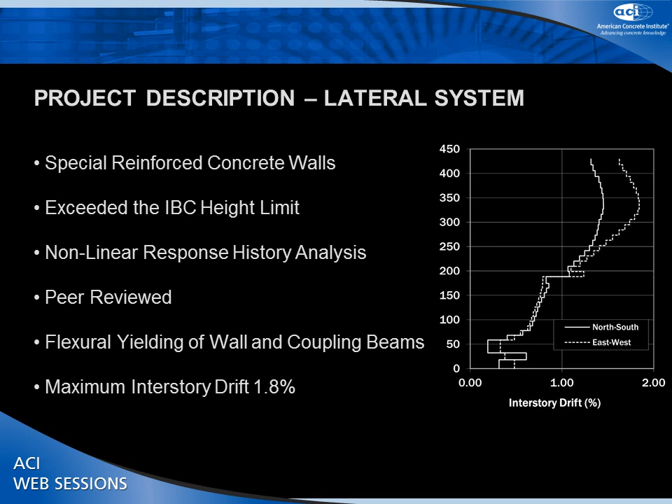Just a couple notes on the behavior of the building: the non-linear behavior is yielding at the hinge of the building, and we also had some coupling beams that we would expect to yield. The performance was the maximum interstory drift was 1.8%.

The gravity system of the building - I'm really focusing on the repetitive tower floors. There were some different gravity systems as we got down to the base of the building, but the typical floor in the building is an 8-inch mildly reinforced slab spanning 23 feet. And that, I would say, is unusual in Seattle.

Typically, a project like this would be done with a post-tension flat plate. But in this particular case, the owner had some aversion to post-tensioning, which is why we wound up with a mildly reinforced system. Since we're on this topic of deformation compatibility, one of the other parts of the design is to demonstrate that the floor system can also handle the building movements. I forget which code cycle the provisions came into Chapter 21 to deal with this, but essentially what we did on this job was comply with the straight provisions of the building code.

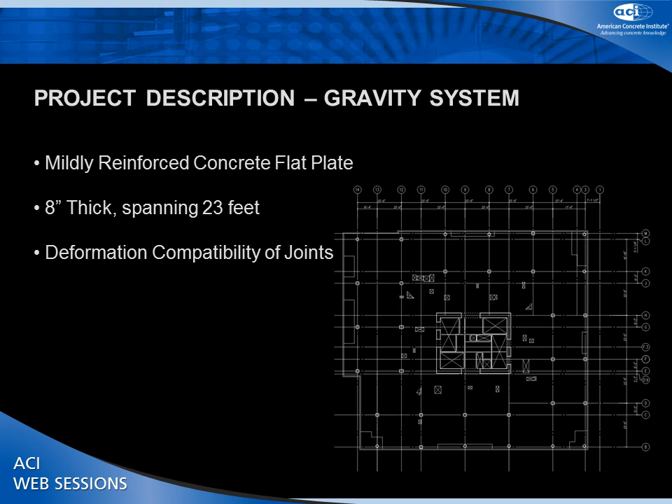One of the perspectives I'm trying to offer this morning is this idea of a designer's perspective on this problem. This may sound a little bit, when I talk about this, like baseball, apple pie kind of stuff. But I hope that as I continue to talk through my approach to this, you'll see that this really does have real implications for decisions I make during design.

Obviously my number one priority is life safety. And then from there, I start thinking about what's the owner's interest here. Usually the most common things are cost and schedule - that's what owners worry about. Some cases there may also be performance concerns, but on this topic of deformation compatibility, really all the owner cares about is least cost and building it as quickly as possible.

And then once I've taken care of the public's interest and the interest of the owner, then frankly I'm worried about my interest. One of my interests here is to do the least amount of effort that I can while still doing something that's safe and still meeting what the owner needs.

So how I think about that least effort approach is that I really need to focus on the engineering that I need to do to produce the drawings. It might be nice to do something else just to totally understand how the building is going to behave. But really I need to work backwards from the drawings to what is the engineering I need to do to justify what's on the drawings.

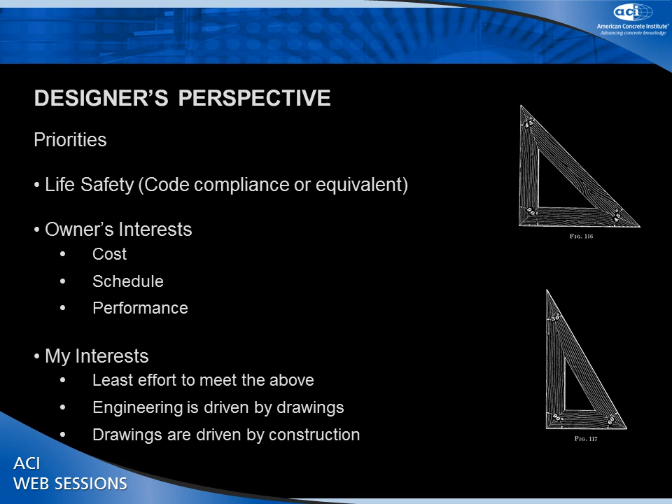And then the drawings themselves need to be driven by the ultimate end use of the contractor constructing the building. So I need to think about the drawings from what does the contractor need to know. Then as the engineer, I think about what do I need to understand to be able to put the stuff on the drawings, and not really to do much beyond that. So I've laid out that framework.

Let's take a look at what the code says. What the code basically says for this deformation compatibility is the first decision you have to make is whether you're going to calculate the forces due to the building displacements - in this case, actually model the columns with the building and then see what forces that introduces into the columns.

Obviously, especially in this case where we're doing this whole nonlinear response history analysis, it's certainly a doable job, but there's going to be some real effort there. So just thinking about this from my interest point of view - I'm not too thrilled about that idea.

But if I don't calculate the forces, then I immediately need to detail the column as if I'm expecting the column to hinge in a seismic event. And so there's going to be some consequences for the owner - it's probably going to be a more costly, slower to build system than it would be otherwise.

But if I choose to go the route of checking the capacity of the column for those imposed forces, and the column actually proves that it can withstand those forces, then I get a break on the detailing because we know that the column is not going to have to hinge in the seismic event, and so I can back off on the reinforcing. There is a chance that I could look at the column and it's not okay, and then I get kicked back into needing to detail it as if it's going to hinge.

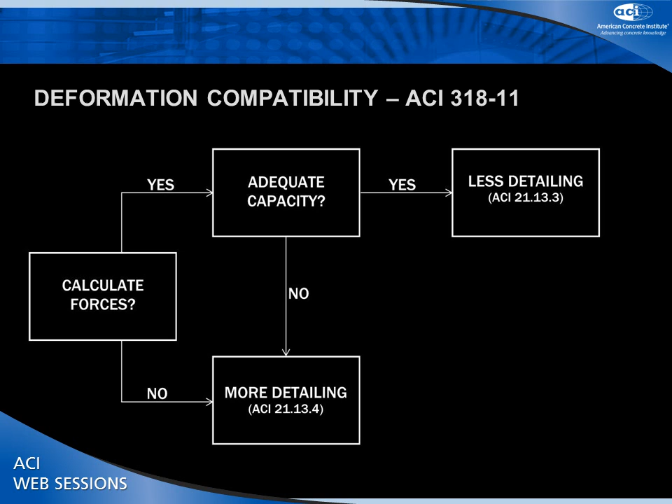So it's kind of clear to me in thinking about this that it's in the owner's interest that I calculate the forces so that I can do the minimum amount of detailing for the column. But let's think a little bit more about what's involved on my end in doing that. The commentary to this section gives us some guidance as to how we need to go about checking deformation compatibility.

And there's a bunch of stuff here.

Models used to determine design displacement of buildings should be chosen to produce results that conservatively bound expected values of the design earthquake, and should include, as appropriate, effects of concrete cracking, foundation flexibility, and the deformation of floor and roof diaphragms. All good stuff.

I certainly can go through and make some judgments and figure out how I want to capture this behavior. But I'm thinking about this in context of having a peer reviewer involved. I'll have one opinion about what the effects of concrete cracking are, and the peer reviewer may well have a different set of thoughts about it, and I'm doing all these nonlinear response history analyses. So as I look at this more closely, it's continuing to make me a little nervous about what the effort here is going to be.

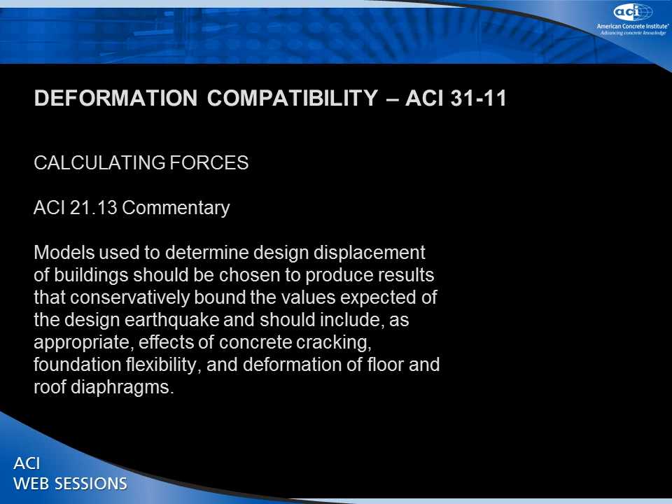That leads me to ask: what really is the consequence for the project if I was to not calculate those forces? So for this, I'm just happy to pick a column near the base of the tower. It happens to be an 18 by 24 column, 8,000 PSI concrete, and a longitudinal steel percentage of 2.5%.

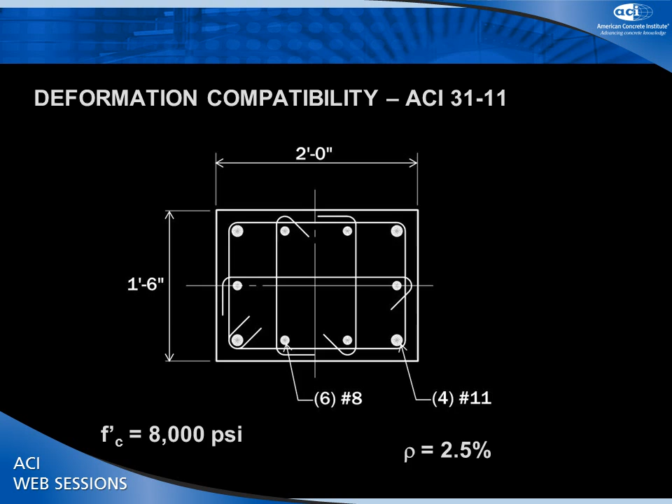So if I look at what's the difference in the detailing provisions of the code, depending on whether I don't calculate the forces and detail at the hinge, or whether I'm able to show that it's okay and get away with the lesser detailing - immediately you can see I have a bunch more notes on the right-hand side, which is the case where we need to detail the column to allow it to hinge.

Specifically, the biggest issue there is that the lap splice for the vertical bars has to be in the center half of the column, and contractors hate doing that. They hate having to do their splices up in the air. So if we were to ask a contractor what they thought about these two details, that's probably would be their biggest objection - having to put those lap splices at mid-height.

You can also see that the ties are more intense - they get as tight as number 5's at 4 inches on center in the hinge regions. Whereas if I can do the minimal detailing, I can get away with doing number 4 ties at 5 inches for the full height. So there's clearly some savings to be involved by doing the lesser detailing, and a pretty good incentive to figure out a way to do this.

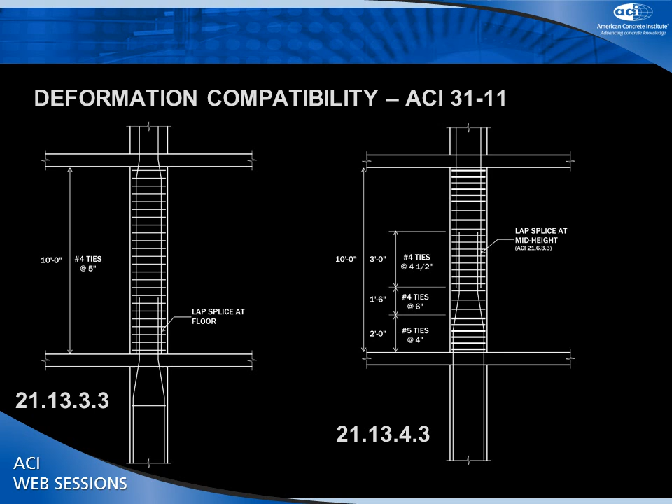And so, let's go here. Okay.

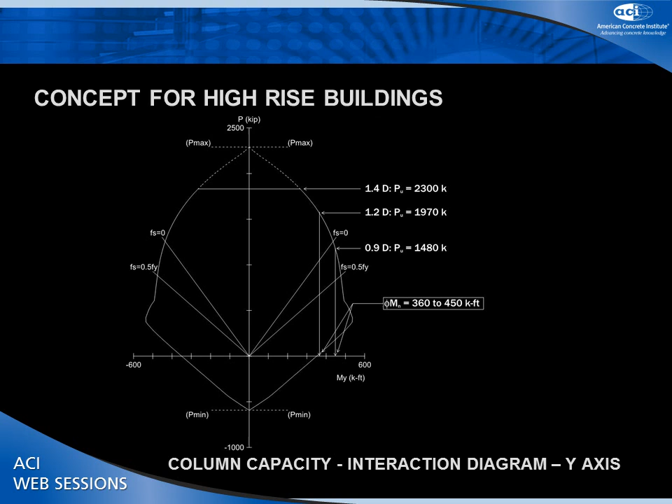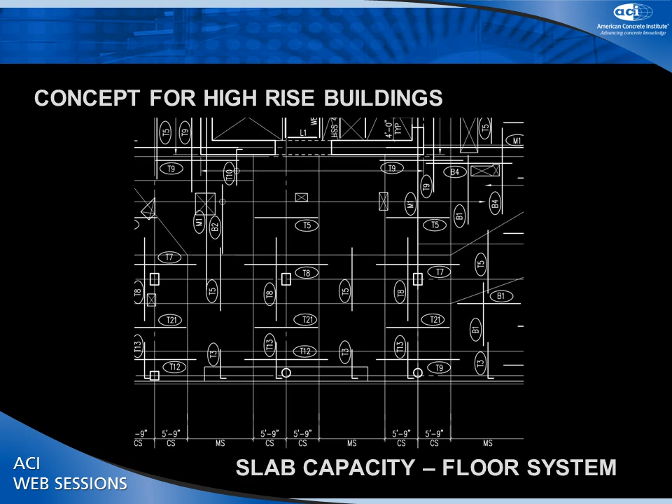So my conclusion is that this suggests maybe I don't need to be - I should say careful, that's not a very good word - very precise about how I determine the demand of the column, because I've got so much capacity here to play with. And then if I think about the floor system, I've got this 8-inch mildly reinforced flat plate. It's probably not going to have a whole lot of strength, particularly once you compare it to the columns.

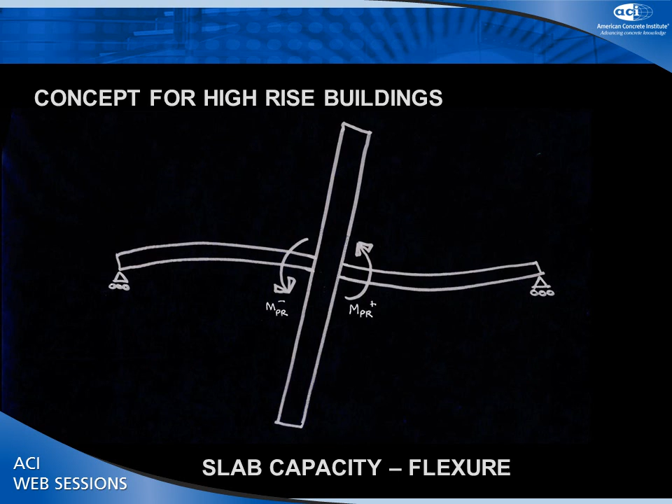So what that suggested to me is why not simply demonstrate that the columns are strong enough that we can yield the floor framing and we're fine. We've already demonstrated - we did the deformation compatibility check of the floor - so we've shown that the floor can handle the deformations that would be involved in this mechanism. So why not just show that the column's stronger than the floor, we're okay, good to go.

And so then the question I'm faced with is, well, how do I want to compute the capacity of my floor system? So my first thought was, why not look at what's happening in the punching region? That's what we're checking when we check deformation compatibility. That's often the weak link in the floor.

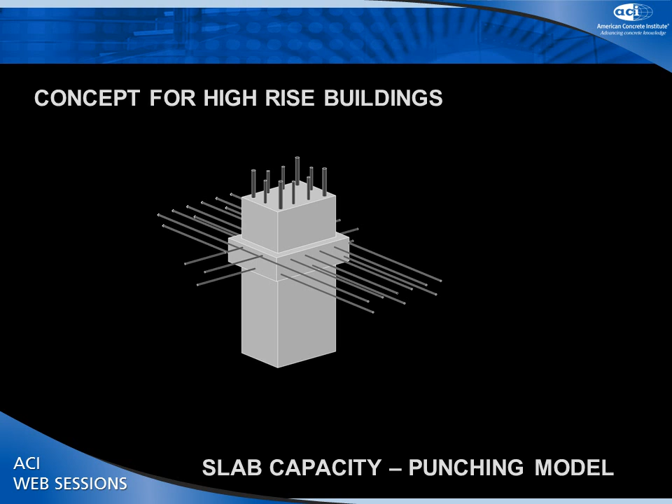But what I didn't like about this is its behavior there is pretty complex. You've got unbalanced moments, you've got shears, some torsion going on, and so I could probably come up with a pretty good estimate of what I think the moment it could withstand. But again, if I need a simple story to tell a peer reviewer, this doesn't sound like it's going to be a simple story to me.

And so that led me then to another mechanism, which is just simply to take the full width of the slab from mid-bay to mid-bay and just look at all the slab reinforcing in that zone. How much moment can I crank into that strip? Because there's no way that any more force can be delivered to that column than what it would take to just fully yield the slab.

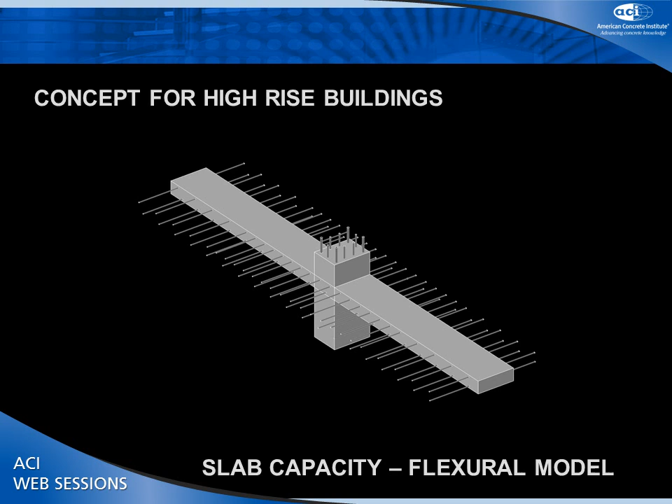And so, let's just go back there. That's really just the gist of my whole presentation: to estimate the capacity of the floor system and then show that your column is more than okay for that capacity. And so I wanted to walk through a little example and show how that actually played out for that particular column.

And it was a 5-step procedure that I used to check this. So obviously the first step is to figure out what the demand from yielding the floor system is. And then from that, like we looked at those interaction diagrams a little bit ago, I can look at, for that moment, how much axial load I could put into the column.

And then I just compare that. Once I've established that acceptable range of axial load, I can compare that to the loads I've actually computed on the columns. And if I show that's okay, then I get to jump to doing that lesser amount of detailing. And then the last question I'm faced with is I just need to also demonstrate that shear in the column is going to be fine.

And so the first thing to do that is just to figure out what the minimum amount of confinement I need is, and then it'll be pretty easy to show that our shear capacity is fine.

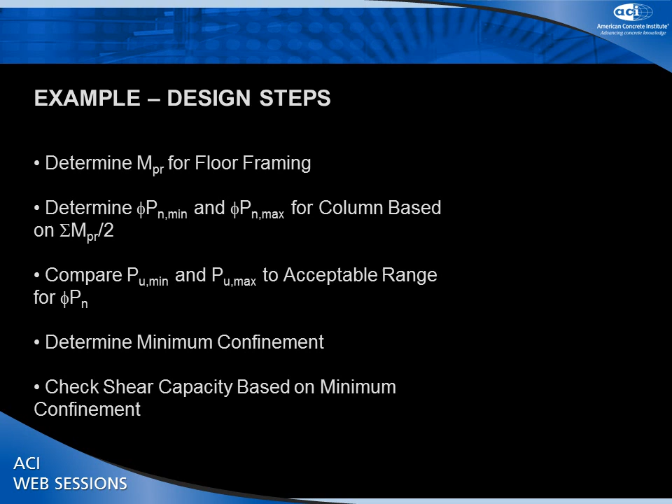And so in order to figure out the capacity of the slab, we need to basically just look at, for a given column, how much reinforcing is there that we'd have to yield to create that mechanism in the slab. For the particular column we're going to look at, it's the middle column on the screen there. I've got bottom reinforcing in the slab, number 4 at 13. And then obviously I have heavy reinforcing over the column and some lighter reinforcing out in the middle strip.

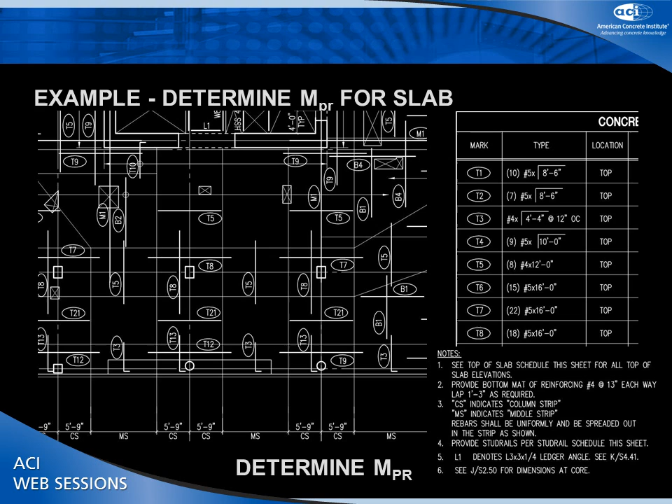And so I'm going to have the positive moment developing on one side of the column, the negative moment on the other. So first I compute the positive moment capacity here. You could say I've got the 4s at 13, winds up being a little more than 4 inches of steel in it, which gives me 184 kip feet of capacity, of potential capacity. And since we're doing MPR here, you can see that there's no phi factor, and I'm hitting the yield stress with the 1.25. So this is really how much force the slab could develop.

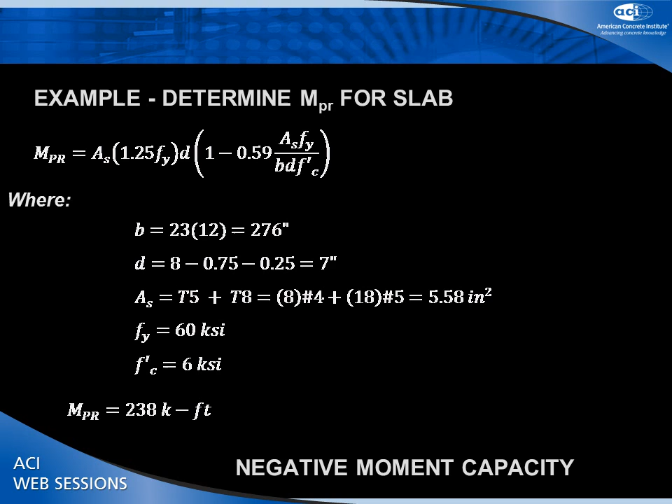And then I just do the same exercise for the negative steel. Obviously I've got more negative steel than positive steel, so it gives me another 238 kip feet of moment. And then the total demand on the column is basically just taking the sum of those moments on the two sides, and then I divide that in half, because half the moment goes up, half the moment goes down. And so then the moment that I need to check my columns for winds up being just a shade over 200 kip feet of moment.

And if you remember back to what those interaction diagrams we were looking at, I think you know how this is all going to turn out.

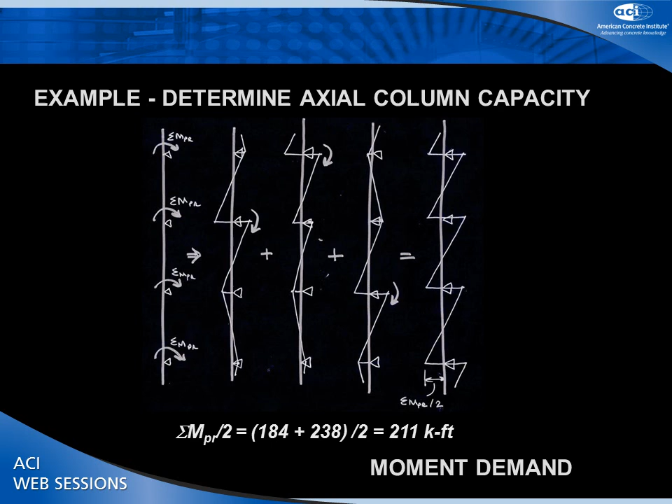And so this is the strong direction of the column, and now I'm simply looking for my 211 kip-feet moment, how much axial load can the column withstand. I got a huge range here. I could put as much as 1,830 kips of compression load in the column, or the column could go into 350 kips of tension, and it would still be okay.

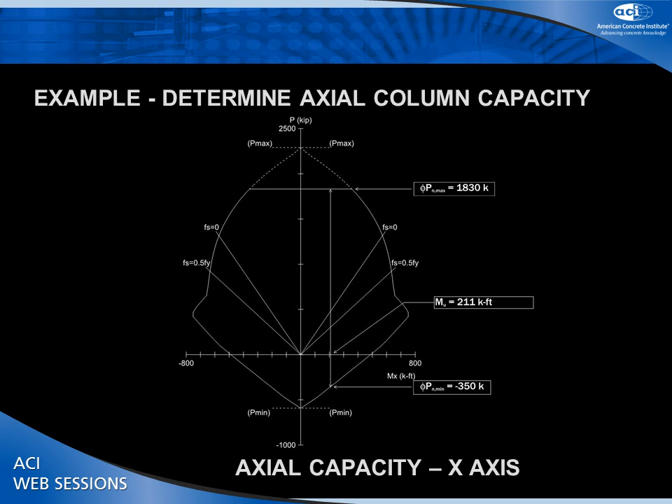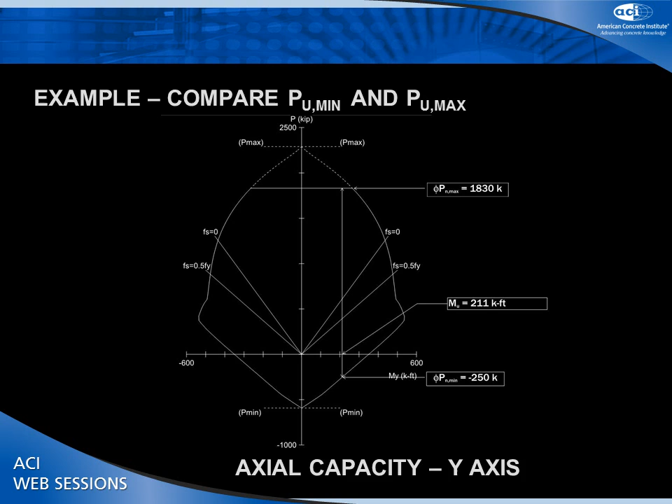And then if we look in the weak direction, it's about the same. I could again max out 1,830 kips, or take up to 250 kips of tension. So for the amount of demand that the floor system can possibly put into the column, the column's not working hard at all. And so then I just compare that range. You can see we're nowhere near.

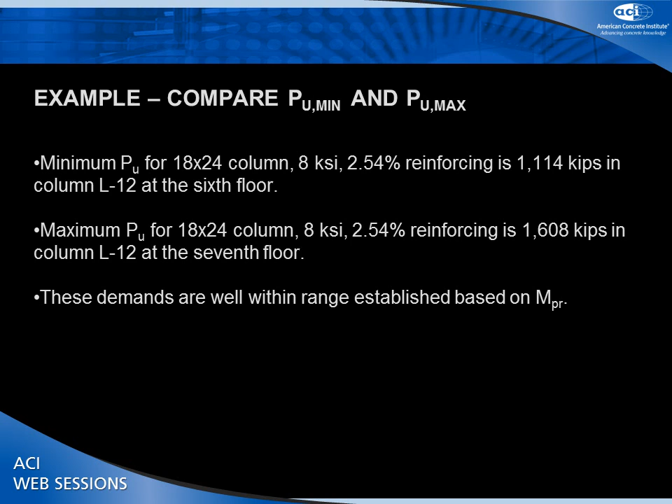So the lightest load I had in a column, that particular column with 2.5% of reinforcing in it, was 1,100 kips. The biggest load was 1,600 kips. I'm way up top of the interaction diagram, taking the 211 kip-feet moment that the floor system can generate, no problem at all.

And so then I'm just left with figuring out what the minimum confinement in the column is, and then I'm going to check it for shear. And because the column is so heavily axially loaded, I do fall into some more stringent things as far as tie spacing and area of steel.

And so the tie spacing just needs to be 6 times the diameter of the smallest longitudinal bar. In this particular column, I had number 8 bars, so that would say 6-inch spacing. It's also limited to 6 inches, so those two are the same. And then this last equation is basically a function of what the lateral spacing of the confining steel is in the column.

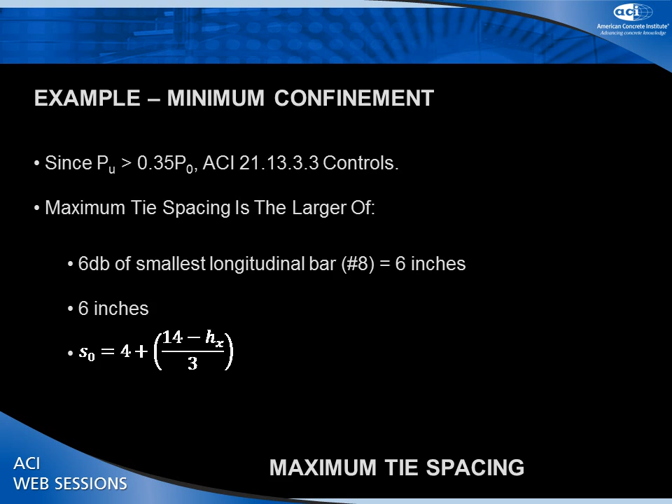And we can see that on this side, in the wide direction I've got 4 ties crossing it, and in the narrow direction I've got 3 ties, giving me the biggest space between confining reinforcement of 9 inches. And so that dumps out and tells me that would actually be my controlling case. I would need to get the ties down to 5.5 inches, something like that.

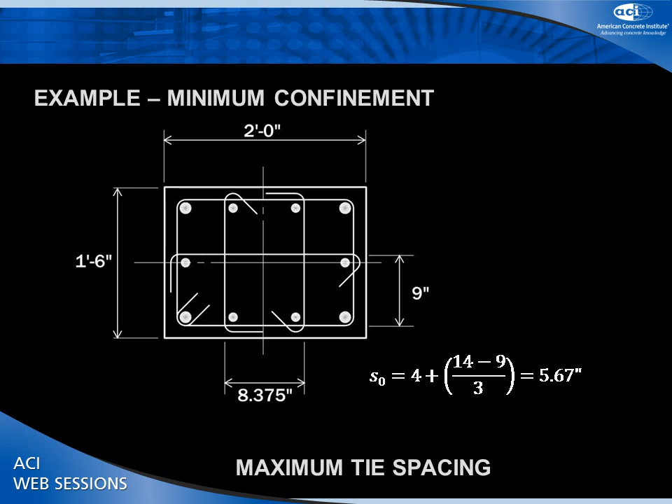And then the other requirement is I need to provide a certain minimum amount of area of steel. So I've established how the ties need to be spaced across the column, and how they need to be spaced vertically in the column. And then I just need to figure out what the area of steel is. Since this column is not expected to behave nonlinear in the nonlinear range, I get to use half the confinement that I would need if it was otherwise.

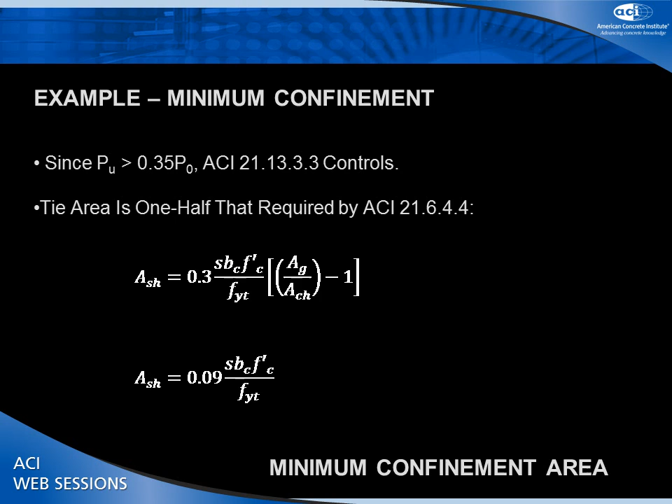And so when I run through the numbers on that, we find out that in the strong direction of the column, or across the wide face of the column, I would need number 4s at 5. And then we do the same exercise across the narrow face. It's also number 4s at 5.

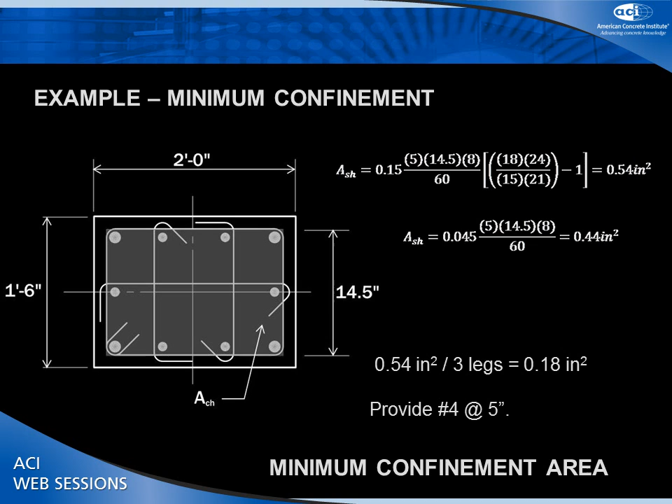And then the last thing I need to do is just look at the shear strength. It winds up being a trivial amount of shear once you think about how much steel I have in it. I didn't even bother to run the calc on it, because it's obvious—if I've got 20 kips of shear in a column that's got this much confinement, this much axial load on it, we're going to be good.

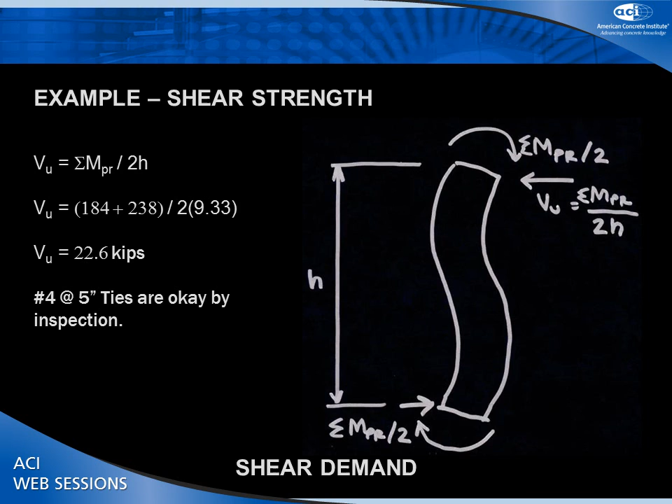And so that was really all I wanted to share with you this morning. We have time for questions.

Yes? I like the simple set of steps because it can save everybody a lot of time in the long run when they look at everything. What I didn't see in the steps is, do you need to do a check of the moment transfer from the slab to the column, which is a combination of flexure and shear?

Right, and so I guess for this case, I felt like you really don't. This is not a case where you need to find the lowest demand scenario, you just need to find a demand scenario. And so for that reason, I picked this mechanism as one where I can easily define what the capacity is that's going to generate it. If the punching shear situation has less capacity, that's fine—I'm even better off. And I've already done the deformation compatibility check to show that zone can take the deformations. Thank you very much.